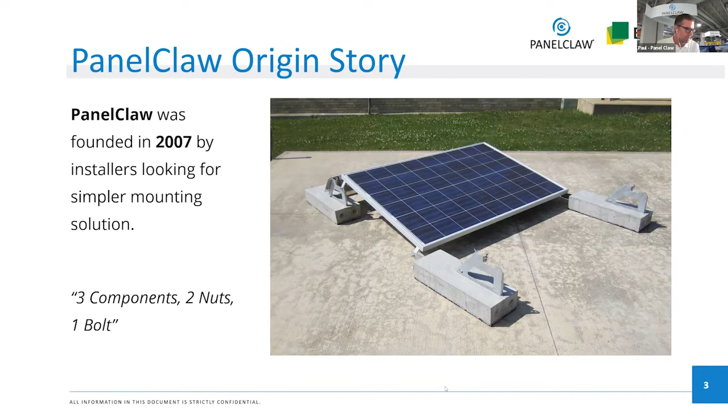So here's where we're at today. PanelClaw was acquired by ESDEC in November of 2020. ESDEC is the largest provider of rooftop mounting solutions in the world. They operate in Europe, in India, and here in the US. Our other brands include IronRidge and QuickMount, and PanelClaw is operating as an independent business unit focused on C&I rooftop.

Since the acquisition, though, we've really maintained our history of innovation. In 2021, we were the first company to get bifacial modules added to our UL 2703 listing for fire. There were a number of new module types for bifacial modules, and they have now been added to our 2703 listing for fire with clawFR.

And last year, we were also the first rooftop racking company to undergo a technical product review by DNV. It's a bankability study, which is table stakes for the utility space, table stakes for modules and inverters. No one had done it in the rooftop racking space. So that study was completed last year, and we're the first company now to be able to talk to financiers, to asset owners, to more than just installers.

We want to make sure that people buying these systems understand that it's not just about the price, it's about long-term durability. And we now have that document in hand from a third party, validating all of our hardware, validating all of our design methodologies, our wind tunnel testing, our friction testing, and so on. So hopefully that's a helpful background.

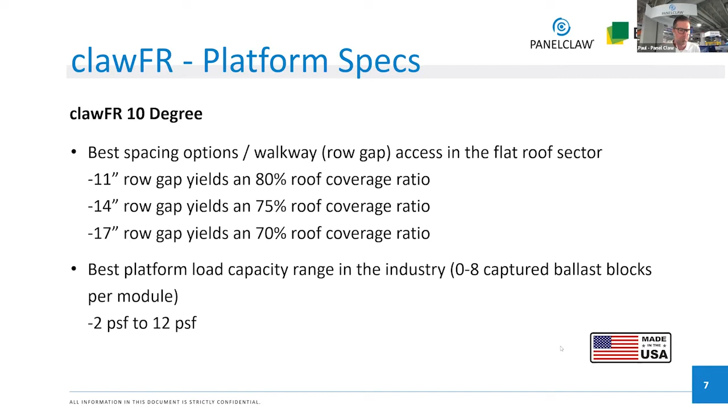So dual tilt should look pretty similar, right? Some of the same components, the same sort of essential order of operations you'll see with dual tilt. Ballast blocks hidden under the modules, great aesthetics. You just get better power density with dual tilt, okay? We talked about an 80% coverage ratio with 10-degree 11-inch spacing. With dual tilt, you've got a 90% coverage ratio, which is great.

The other real advantage to dual tilt is the aerodynamics of the system. So if you're really working on a project where you know that the roof has a limited reserve capacity, and there's a premium on reducing the amount of roof attachments or the amount of ballast blocks required on that project, dual tilt may be a great option for you. So those are basically the two products that we're going to spend the rest of the day talking about.

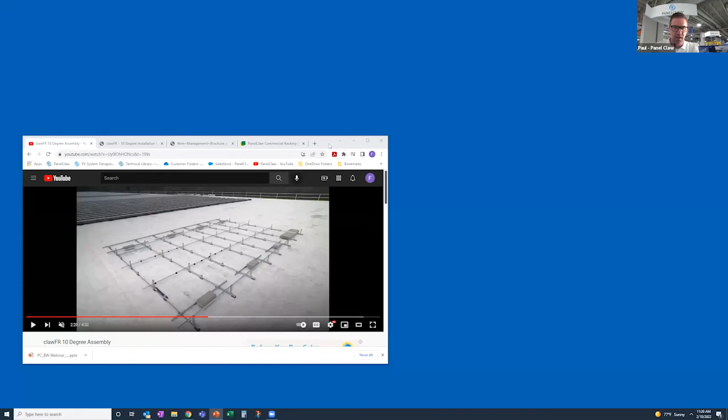Okay, I want to pause for a moment and go over to our YouTube channel. So when you start talking about how does the system install, I can say everything that we just talked about is great, but here's a better visual for you.

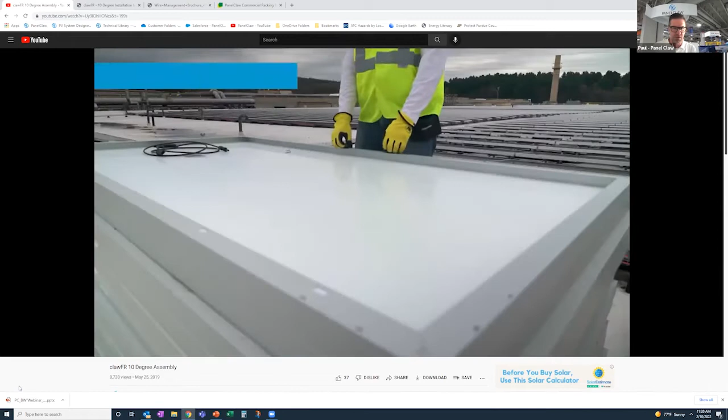But I've fast forwarded to sort of an important part of the video. I'll scroll this thing now and we can talk about it together. So you see actually how the system gets built. So I mentioned that here you're basically staged and you're ready to hang your modules. Your grid is entirely built. Module prep is really nothing.

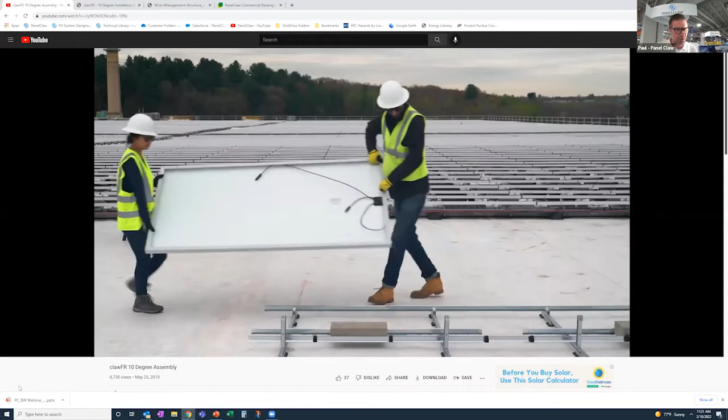All you're doing is locating the leads at the proper area. If you need to install an RSD unit on it, you may do that at this point if you're installing it directly to the frame. When you go to hang the module, all you do is line it up. You put this claw directly over the cam, give it a little push down, and when you rotate it down, there will be a little bit of resistance and you'll hear a scratching sound as the cam on the low end grips that module frame.

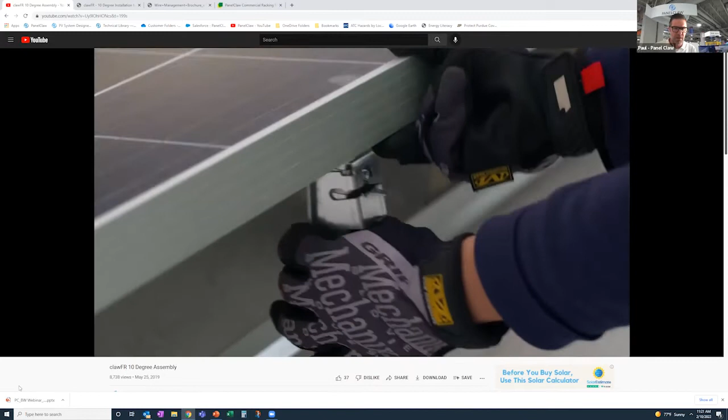On the high side, all you do is push the tilt arm forward, drop the module frame down on it and pull it back, and it locks in place on the high side. So when we first started talking about ClawFR and showing customers how this was to install, this is where we would get literally like standing room ovations. Installers were super excited about this. No more fumbling around with nuts and bolts or top clamps.

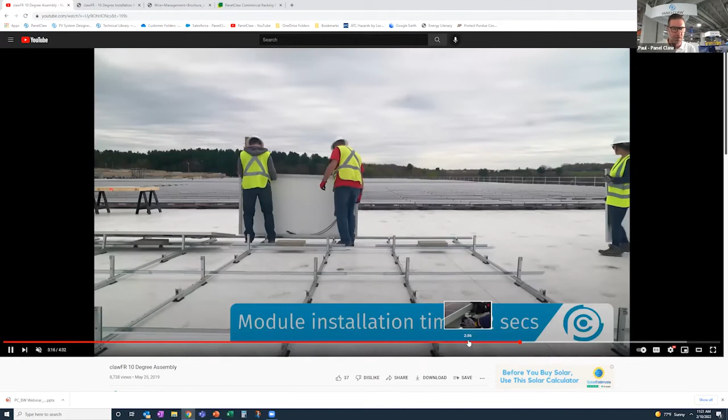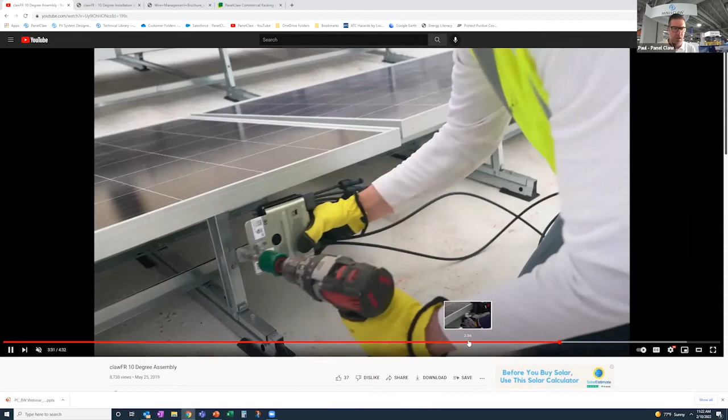We're securing on the long side of the module, on the low end, on the return flange of the module, right? Far away from the cells, far away from the back sheet, and on the strongest part of the module, on the long side of it. So that's really the headline for how the system installs fast. Hopefully that video is worth sharing if you haven't seen it. Let me go bounce back to the presentation.

And you also now are realizing the advantage of not having 18 or 24 inches worth of material outbound of the southern edge of the array. So not only is there a great coverage ratio to the product, there's also what you'd call a real coverage ratio. You don't have a bunch of material extending outside of the array footprint. So you can get very creative, and you can get a lot of power on roofs where you may not with a lot of our competitors and even our legacy products.

And the other piece worth noting is that ClawFR, in terms of module compatibility, is nearly all framed modules, even some of the new jumbo size modules we're seeing. We've been adding those to our listing. We can accommodate modules up to, I want to say, 2.5 meters long at this point. Our list of approved modules grows by the month. I want to say we're up around 400 different models from 50 different manufacturers. And that list is also on our website.

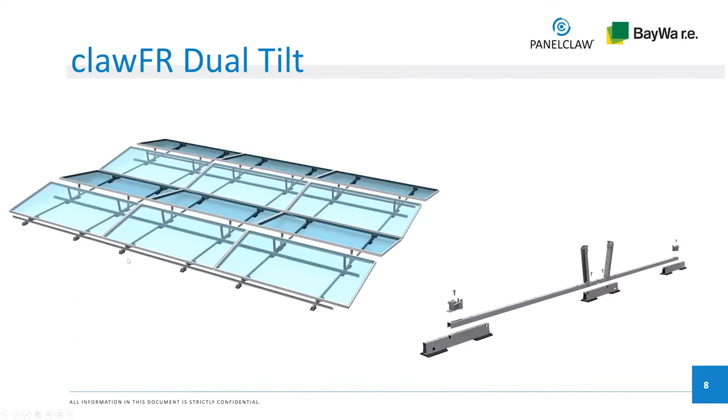We had a couple of quick questions come in that I wanted to touch on while we're on this slide. One of our questions is coming from an installer out in California, and they're asking, can we use ballast blocks on the arrays without ballast trays? I'm doing a bit of interpretation there, but please feel free to hop into the Q&A and clarify your question if I'm getting it wrong. But can you tell us a little bit about using ballast blocks and ballast trays and what the requirements are? Okay, so I think this is probably the best visual for it. And if I don't answer this question directly, let me know.

Some of the images that I've shared with you today don't have any ballast blocks. They resist wind just through aerodynamics and friction, or potentially roof attachments. There are no traditional ballast trays in clawFR. If you zoom in on what we're looking at, where my mouse is hovering, the isometric view on the left side of the screen, you can see this module here has a ballast block under it. This module does not. One of our components is this east-west rail, which interconnects the different columns and makes this east-west connectivity.

The ballast map is really simple. If you were to look at this ballast map, you have this 3x3. You need 1 block underneath all of these modules. So you place an inverted rail there to capture that ballast block. And wherever you don't need ballast blocks, there is no additional rail there. I hope that makes sense. There is no traditional ballast tray. The blocks are captured between these 2 rails.

So they just clarified, saying that some of the authorities having jurisdiction that they're dealing with in California do require ballast trays. So is there a ballast tray option? No, I'd love to understand that question a little bit more. We've done hundreds, thousands of projects in California, and that has never come up. I don't know if it's an issue of restraining the ballast blocks, I'm not sure what's behind the question there, but I've never bumped into that.

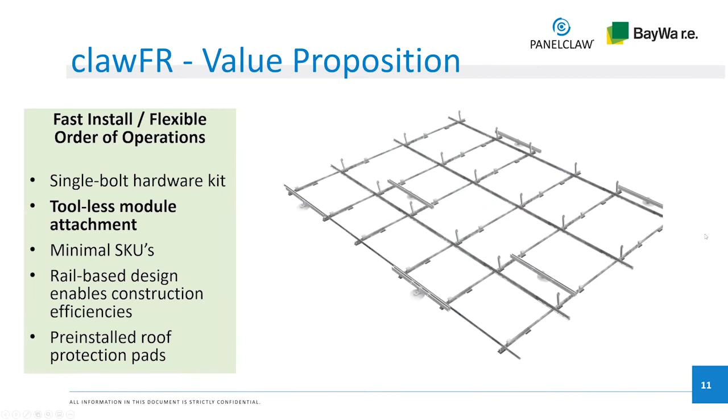If your customer was asking specifically about LADBS, we offer a fully attached design for LADBS. clawFR really lends itself to LADBS projects, and they are the most difficult jurisdiction out there, with the exception of the DSA. And if anyone else in California has dealt with the DSA, they're probably shaking their heads. You can use something like the facet to attach there and remove the need for any ballasting.

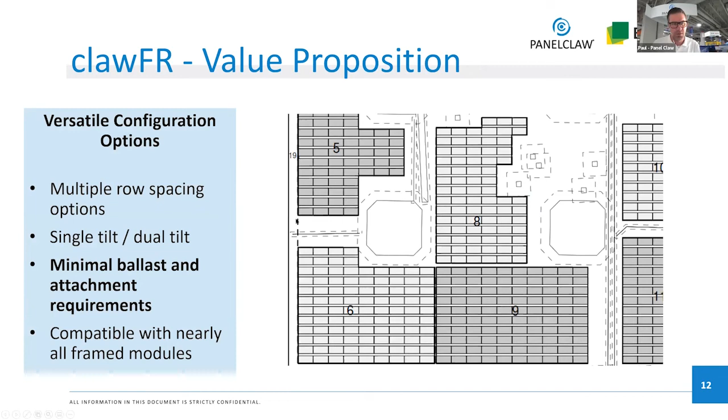There is one other question where it may make sense to stay on that previous slide for one more second. Okay. The question is, how do you recommend installing slip sheets under the rail? We're often required to install slip sheets to maintain roof warranties, and there's a component shown here that maybe addresses that. Yeah, maybe this visual here is the best way to look at it. clawFR arrives at your project with these roof protection pads pre-installed on the bottom of every base. So depending on the roof type, if it's a cap sheet or a modified bitumen roof, or it's not under warranty, you may be able to sidestep the whole slip sheet issue altogether.

If it's a single ply membrane, most manufacturers won't give us a waiver, but they'll say, we highly recommend that you use slip sheets. They won't require them with PanelClaw because our system is elevated off the deck. The other end of the spectrum is it doesn't matter what you put on your racking system in terms of roof protection pads. We could put pillows underneath every base and they'd still want to see slip sheets. So that is a reality of a lot of our projects.

There are 3 different scenarios that customers will consider depending on what their cost structure looks like and what their customer wants. The first one is where underneath every single one of these roof pads, they'll cut out a slip sheet. These roof pads are about 3 by 4, so the slip sheets usually have a couple inches of margin. So each slip sheet is, let's say, 8 by 10, and they'll cut out however many are needed to put one under each roof pad.

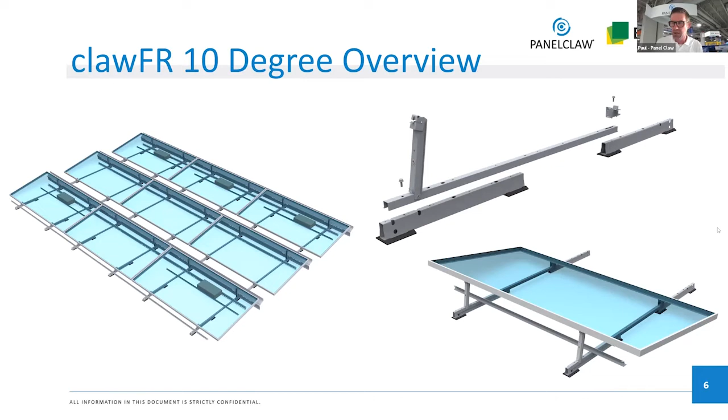Yeah, that's great. Thank you for that detail. It's 11:30. Good. Hope this is interesting. We still got about half hour. So I've got maybe another 10, 15 minutes worth of prepared slides to talk about, and then we'll go into more Q&A. That's the fun part for me.

So, all right. If you think back to that value prop that we were talking about, the third leg was the realization and the acknowledgement that the systems are going to be around for 25 years. So we have taken a lot of steps within the engineering of ClawFR to make sure that these systems perform as intended for 25 years. If you remember that video where we were installing the modules, if you run that video backwards, that's exactly how you remove one module from the array.

It's really, really simple. And the other thing that's probably not clear from all of these visuals, because this is always the sexy view of the array, glass side: if you look at it from the back, our 10-degree system, although there's only 11 inches worth of space, the wind deflector design gives you an actual real walkway of 9, 10 inches. There's not a wind deflector that comes back on an angle giving you 2 inches worth of a walkway. So even once the system's installed and the wind deflectors are hung, there's still the ability to get into the interior of the array.

And the other part of O&M that I think is worth talking about, because this is probably the one part of the project which no other racking companies really think about, and that's commissioning, right? Commissioning falls after the racking company's done, but before you're in O&M mode. And so a lot of these features that we talk about being benefits to O&M, they're really benefits to commissioning.

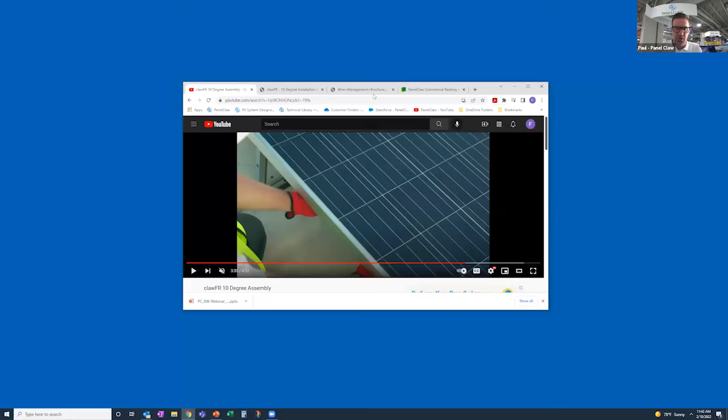So I've always sort of thought about that as like the Microsoft approach, like, hey, here's your operating system. You guys put whatever apps you want into it. With ClawFR, we're taking more of an Apple approach, which is, our core competency is still module compatibility, roofing compatibility, understanding wind loads, seismic loads, structural reserve capacity, mechanical engineering.

We are also now, with some really good partners, able to develop a suite of wire management solutions, which take some of the guesswork out of the project. So I wanted to highlight just three of them, which have been on the menu for a while: our mounting bracket for optimizers and RSD units, a wire clip, which can be used to route a number of home runs east-west, and then a wire router, which is great for string jumpers.

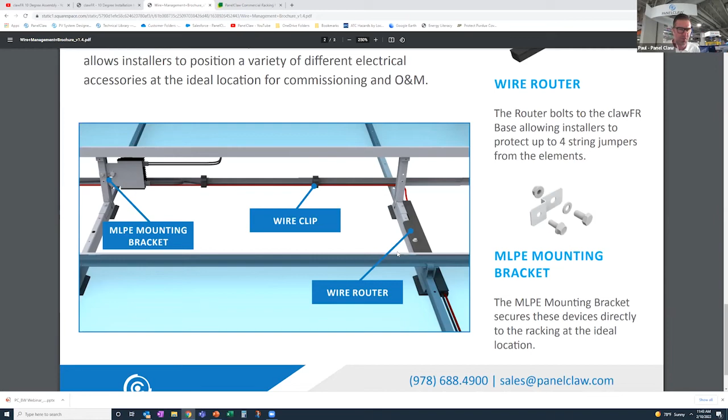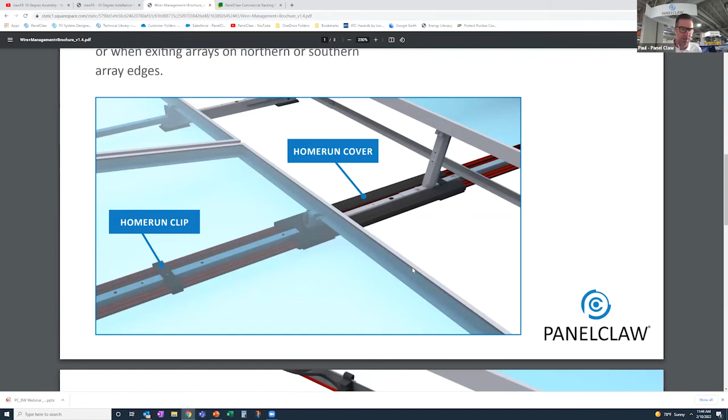And then there's a cover which you can snap on to protect it. So you've got zero tools. You've got a plug and play method of routing up to 24 number 10s north-south under the array footprint, elevated off the deck, protected from the elements, without having to mock something up in your warehouse or, the more common practice, figure it out as you go along or use zip ties.

The home run suite here is really, I think, a tip of the hat to our customers and them demanding more from us. And we're really proud of this. It's not a big ticket item for us, but it makes customers' lives a lot easier. And it does allow you to standardize across a bunch of different projects. And if you're working with installation companies outside of your company, this allows you to de-risk that as well.

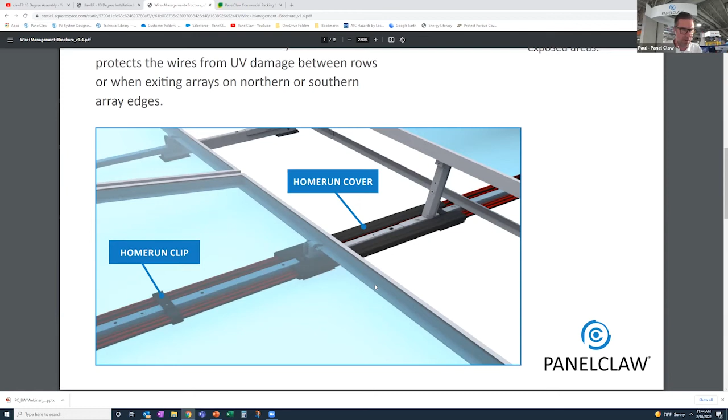A subcontractor may just use whatever they find to install the system. If you just give them the home run clips and covers, there's no guesswork around how your system is being wired.

Okay, I wanted to mention one or two other things, and then the design assistant. So ClawOS. ClawOS is going to be a transformational product for us, and we think for our customers. Aaron had asked, "What's the workflow on a project?" If you've worked with us in the past, it's probably been painful. You've sent a layout to us. Depending on our backlog, maybe 3 days, maybe 10 days later, we send you a layout back, and then you realize that module is no longer available, so we need to redo the layout with a new module.

We're in triage mode all the time, always trying to make sure we have enough capacity to meet the amount of layouts that come through. It's almost impossible to solve. Bring in software. ClawOS takes 12 years' worth of engineering know-how in wind mapping, bill of materials generation, and calculations, and automates it. So this summer, you, or your friends at BayWa, will be able to log into ClawOS and generate a racking plan set. So you're not subject to our backlog or our lead times on the design side.

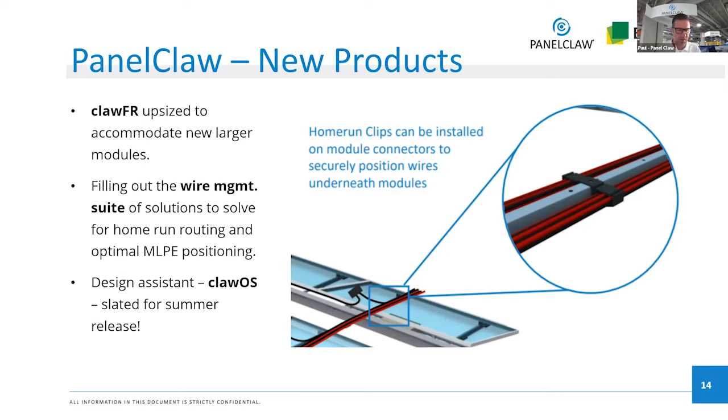Everybody's talking about soft costs. Soft costs are still real money. How many engineers, how many designers do you need on staff to get projects from concept to permitting? ClawOS will enable you to do more systems with fewer resources, just like it has for us internally. Every single project that has worked with ClawFR has been designed in the ClawOS environment.

Like all software, there have always been band-aids and workarounds and internal tools that our team has used to generate these drawings. ClawOS now is at the point where, with a couple more key initiatives, it will be ready for our partners to use. And we're really, really excited about that.

So that dovetails into, how do we work on a project together? I have to give you this staggered, real world scenario. The cliche: we've got to crawl before we walk before we run. That's really where we're at right now. We're crawling.

Our vision with ClawOS and with this BayWa partnership is to really allow you to deploy ClawFR on any project you'd like. But we're not there today. For the first half of 2022, until ClawOS is up and running, we are going to be subject to that sort of manual process that I described earlier. So that's why we've set a 100 kilowatt minimum system size in place for projects through BayWa.